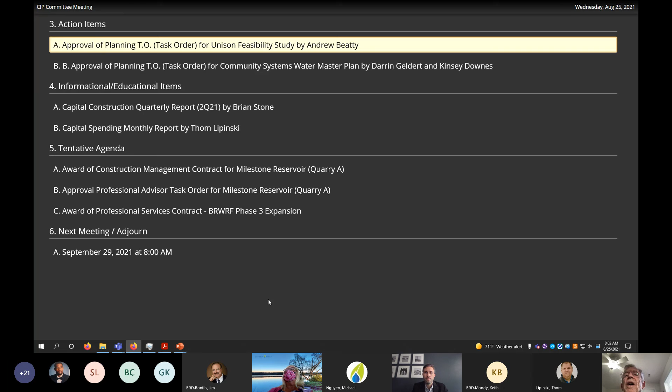Okay, let's move on to action items. The first action item is approval of planning task order for Unison feasibility study.

Good morning to the committee, and thank you for having me. My name is Andrew Beatty, and today I'll be presenting on the feasibility study for the community of Unison. Before I dive into the specifics of this project, I wanted to highlight that this study is being conducted as part of Loudoun County's water and wastewater program.

You may recall that Loudoun Water partnered with the county to establish this program back in 2015, with the purpose of allowing communities to come forward and apply for assistance with any water or wastewater deficiencies they are experiencing. A major responsibility for Loudoun Water is that we are the technical lead responsible for conducting these feasibility studies. As outlined in the program, and as with all previous studies we've conducted as part of this program, Loudoun Water will get reimbursed for this work as it moves forward.

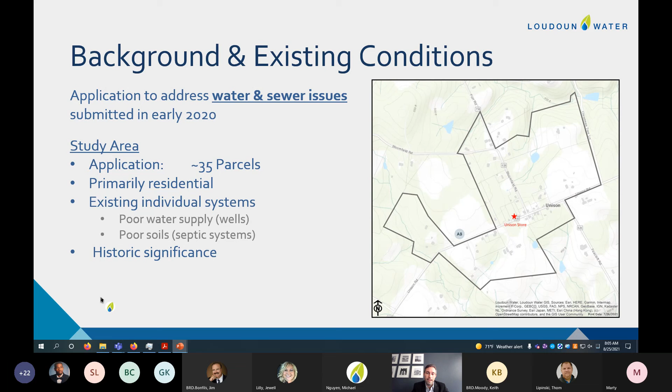It's also important to note that this is a historic community, and that is of significance to the property owners, and will be borne in mind as this project moves forward.

I like this slide because it speaks to a lot of the successes we're beginning to reap since we first partnered with the county in this program. We've incorporated a lot of the lessons learned throughout the years in how best to engage with these communities of need, and that is demonstrated by their willingness to come forward and apply to the program and trust that we can provide assistance to them and help resolve their issues.

We've seen this already, even in scoping the work for this project. Loudoun County staff and the Loudoun Water team have communicated frequently with the project coordinators, who are community members, in order to really listen to them, let them bring forward concerns and raise any issues from the community, let them know that they're being heard and that their concerns will be addressed as the project moves forward. For us, it gives us the opportunity to provide reassurance to the coordinators and the community, as well as manage expectations throughout the process, as this is really just the first step in a long journey to solving any of their issues.

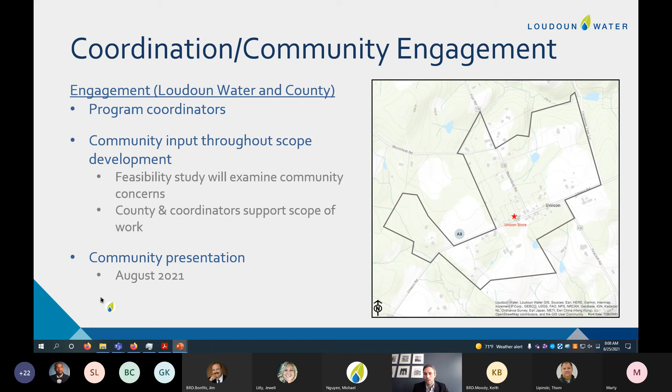Generally, I've outlined the key elements of the scope of work here, and this is in line with the type of work we have done in previous studies, with the main goals being to document the existing conditions, analyze various water and wastewater options, and then offer a recommended path forward for the community.

One item that I will note is the household survey. Whenever we presented this idea to the coordinators, they were very receptive to doing this work. We have learned through our experience from previous projects that we actually glean quite a lot of useful information from the individual responses from the property owners, because it is conducted anonymously. So this is just another example of one of the lessons learned from previous projects in this program, how we incorporate that to really get the best end result. So that's some good news.

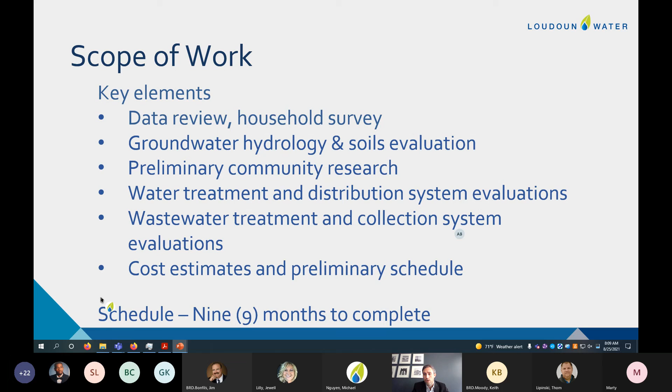Overall, schedule-wise, we're expecting that this project will take approximately 9 months to complete.

For your reference, this is the CIP project snapshot. Really, the two main things I want you to note is that this project has been funded for this year, and that, as I previously mentioned, Loudoun Water will be reimbursed by the county for this work.

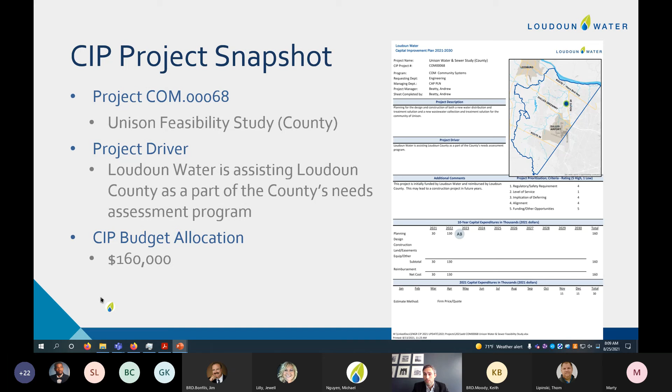The total fee for this project is $140,500. The style and the scope of this work is similar to previous projects we have done in the program. As we are a partner with the county, we have already shared this budget with county staff, and they're comfortable with these numbers.

And then finally, I'll leave before you the recommended motion here, and we'll be happy to answer any questions you may have.

I have no question, I'm just curious though, you mentioned the surveys. Approximately how many surveys do you expect to distribute, and do you have any sense of what the typical return is in terms of surveys? Yes, so for this project, the goal will be to send out a survey and mail it out to all 35 property owners within the study area boundary. We did do a similar effort for the Waterford project.

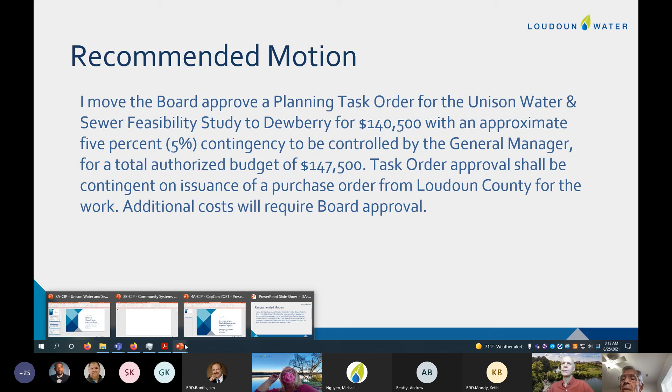Okay, let's move on to the next item. Approval of a planning task order for Community Systems Water Master Plan.

Good morning, everyone. I'm here today to present a Community Systems Water Master Plan task order that we'd like to ask for your approval. I'm Darrin Geldert, I manage our planning programs within the engineering group. And I'm here today with Kinsey Downes, who manages our community systems.

As Darrin says, my name's Kinsey. I manage our community systems. I want to extend a big thanks for his intro, as well as to the committee for having me today. Just stepping through what we do and where we are.

Loudoun Water has 5 independent community water systems that we own and operate. These systems are located along the Route 15 corridor in the county's rural policy area, and of course that's defined by the comp plan as well as zoning ordinances. These systems are developer built.

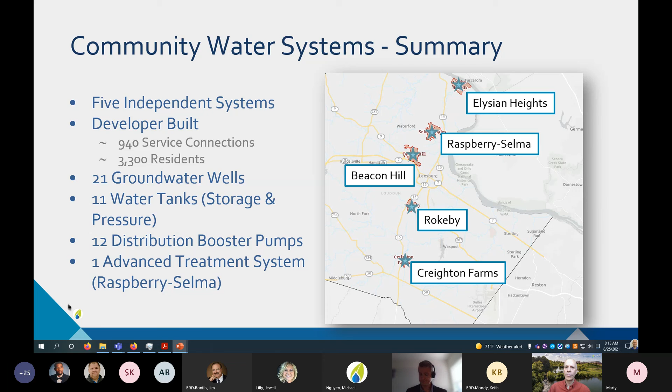I included this slide to just highlight our systems and that they're all somewhat similar. We have groundwater wells located in the developments that pump water to these facilities where it is treated and stored, and it's pumped into the distribution system for use by our residents.

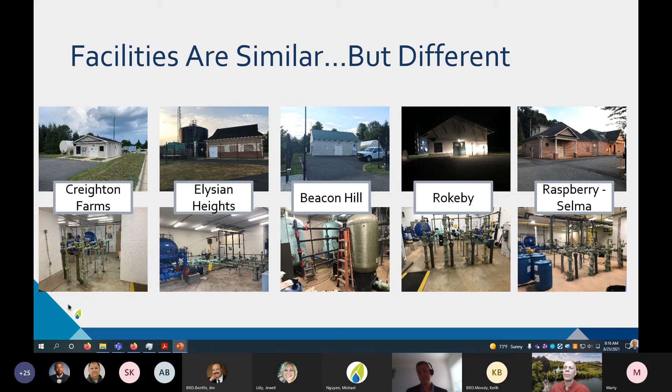Though similar, they're different. You see the sizes, you see the ages - a lot of things that go into planning for R&R activities as well as triggers for capacities. All these assets and their expected lives are at the mercy of system demands, water quality with associated treatment, and of course the materials used during construction.

Darren, please advance the slide. This table right here has a little more details about the systems. I'm not going to step through the whole thing, but I want to talk about the max day column. That is a percentage of the permit that the biggest use for a single day in this calendar year has been used. You'll see that there's 100%.

Not necessarily a bad thing. However, it is a great trigger to understand community use, as well as if we need to do a deeper dive on the reasons why. Highlighting Beacon Hill, you can see that we have about 100% capacity used this year. It was built in 2002, and we had what I call an R&R upgrade in 2019. We did bring on a new source water, which included source water capacity, but that alone did not increase the permit.

I want to highlight Elysian Heights. You can see that under supply wells, I have a 4, then parentheses 1. We have 4 major production wells, and 1 emergency well. There are some restrictions on how this emergency well is used, and it really doesn't have the capacity to be a 1-for-1 replacement. So though it does have a great tool in the toolbox, it is definitely a stopgap if we ever needed to really rely on it.

And finally, Rokeby. Rokeby is also at about 100% capacity, and it was built in 2008. It's one we're tracking. Mr. Moody, question?

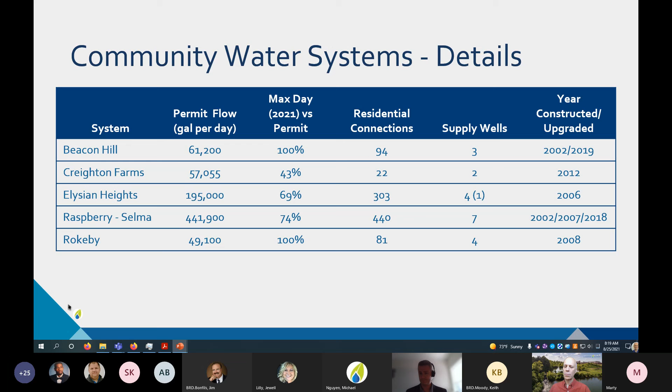Darren, next slide. So you may say, why are we doing a master plan out here? Well, the master plan may address a little bit of the questions you both just posed, but it's also really going to look at the big questions across all the systems, to make sure they're performing as expected, both at the level of service intended in their design, and also what's required by regulation and by Loudoun Water.

So we're going to step through all the different parts, the supply wells, the treatment, the distribution, and make sure they're all operating the way we want them to, then look into the future and ask, are they going to keep doing this? Perhaps there's a desire to have more robust redundancy at all of these and add additional wells, or perhaps there's other distribution upgrades we could do to help remotely monitor some of this.

But basically, we hope for the master plan to help outline a roadmap for us, kind of what needs to be completed, what projects need to happen out there, over the near term and over the longer term, to help maintain and improve our operations. So this is going to tie in a lot with our asset management data, with our CIP process, and it will also impact some of Kinsey's staffing schedules and how operators actually work out there.

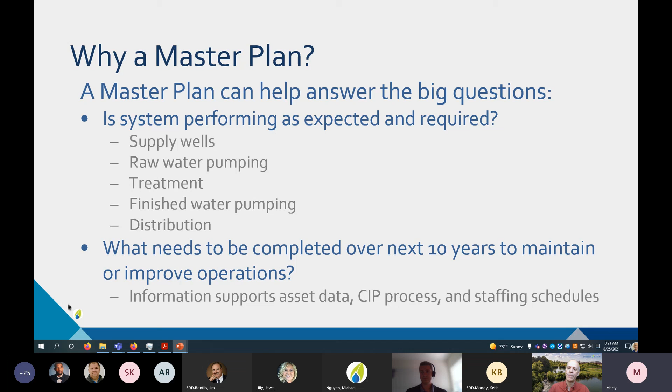And we have a great positive lesson learned from this. We successfully used what I'll call an asset management focused master plan at Beacon Hill recently. In 2016, Beacon Hill, one of our earlier community systems, was approaching its 20-year window where you start looking at replacing some components, primarily electrical, instrumentation, and start looking at how your longer ones are doing.

Staff had fantastic ideas on how we can extend the life of this system, but they were siloed, right? It wasn't under one umbrella. So to help achieve this, we partnered with Hazen, and we tasked them with bringing this under one umbrella, one report that we could champion moving forward.

Just some quick highlights of what they did: they identified end of life, undersized, and inadequate components. They developed this implementation roadmap. This was in phases, looking at things that should be corrected today, possibly near term, and long term.

And of course, we were able to plug this into our CIP efforts, which is a great resource. We have used this roadmap to finish phase 1 and phase 2 corrective actions, and we're always tracking phase 3, seeing if the assumptions still hold true.

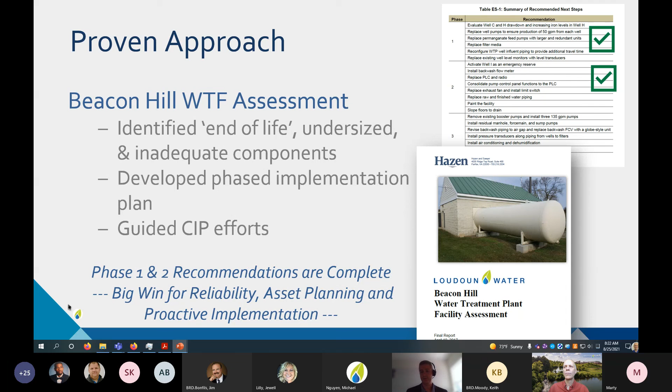So for this project, we worked on the scope of work. It kind of mimics what we did at Beacon Hill, and then probably goes a little bit more beyond that.

It's going to start with what pretty much all master plans start with: gathering the data, reviewing the data. How is this designed? How is it operating? Looking through operating reports, hydraulic models, the groundwater studies already done in the area, tying that all together with site visits and staff interviews to make sure we understand operational strategies and can put a consistent approach across.

And then we're going to develop that into assessments of each facility and tie that all together in this master plan, which will really provide us with a good prioritization of projects that are out there, and provide us that decision framework so we know what to do next.

And then eventually, because this is such a programmatic approach to all of these, this will really streamline our long-term maintenance and operations and help, as Kinsey said, work this into our CIP process.

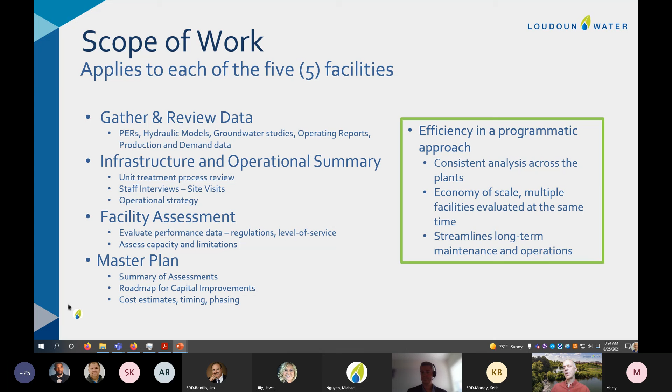So our schedule for this, assuming it's approved and we move forward, would be this fall to kick it off and move through the data review, analysis, and operational reviews.

That will then transition into the assessment and analysis portion, coming up with a final roadmap for each of these five systems, but all tied together to make sure we're treating all these systems with the same level of service, that they're all consistently approached, and trying to figure out where we can perhaps borrow ideas from one system to another.

We're hoping to complete this by spring or summer next year, so we can tie that right into our CIP planning for the following year.

We worked on this task order budget actually for quite a while. I'll let Marty jump in if you have a question.

It's probably obvious, but all of these studies assume current groundwater levels. Is there any attempt to predict the future, to see what's going to happen to groundwater levels going forward?

So we will be asking this consultant we proposed in front of you to work closely with our groundwater monitoring program, which is starting to track and hopefully one day predict what they will be.

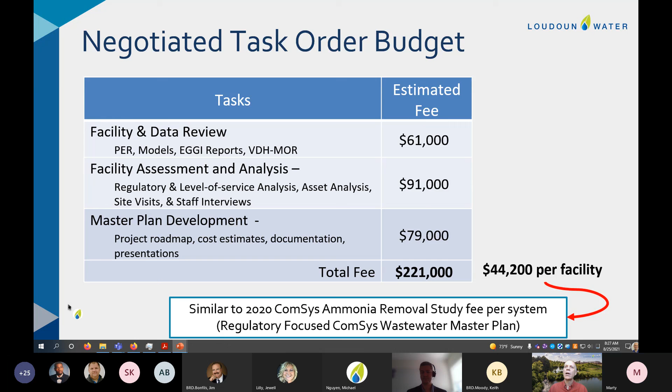And with that, I'd like to open up for any additional questions and leave you with a recommended motion to move this ahead.

Are there any other questions? Hearing none, can I get a motion?

This is Jim. I make the motion for the recommended motion and to place it on the agenda for the next meeting on the consent agenda.

Okay, I second that motion, and I agree to move it to the consent agenda. Thank you.

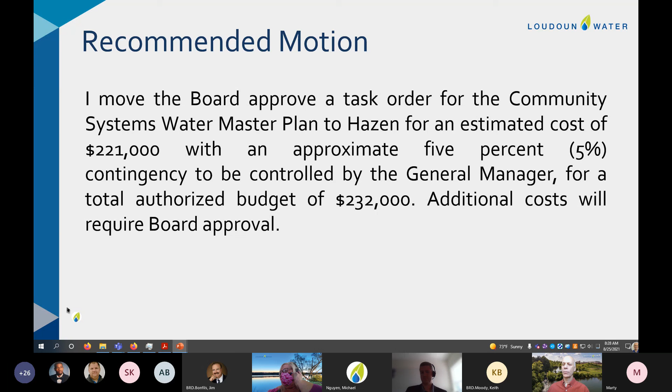Okay, seeing no other questions, I'll take the vote. Mr. Sultan? Yes. Mr. Bonfils? Yes. Mr. Moody? Yes. Ms. Sursakar is absent. Thank you, sir.

Okay, capital construction report. Good morning, CIP committee, CIP chairman. I'm here to present the second quarter capital construction report.

In my report, I'll be discussing the 4 projects listed before you. These are all active projects, and then I'll close the report with the quarterly numbers for all projects, and those that were completed during the quarter as well.

The first project is the Goose Creek Waterline Crossing Project. This project allows us to deliver water from the Goose Creek Reservoir to Trap Rock. Garney's our contractor, and Garney has completed approximately $3 million worth of work through the month of June, and the total contract value is $4.3 million.

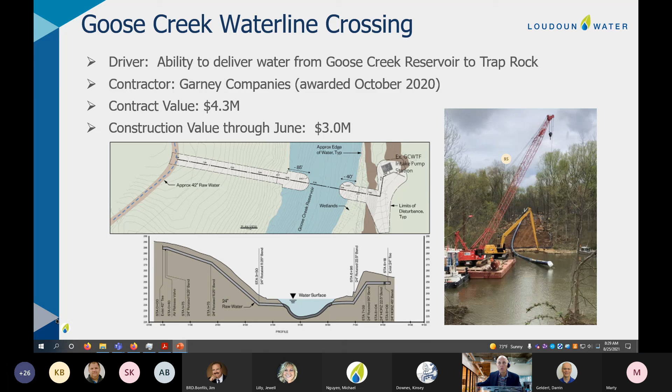The contractor has completed the installation of the water line across the reservoir and has made the tie-in on the Trap Rock side, which is the west side of the reservoir, to our raw water transmission main. They're presently performing work on the east side of the reservoir, where they are removing rock to make the tie-in to allow for the installation of the pipe there as well.

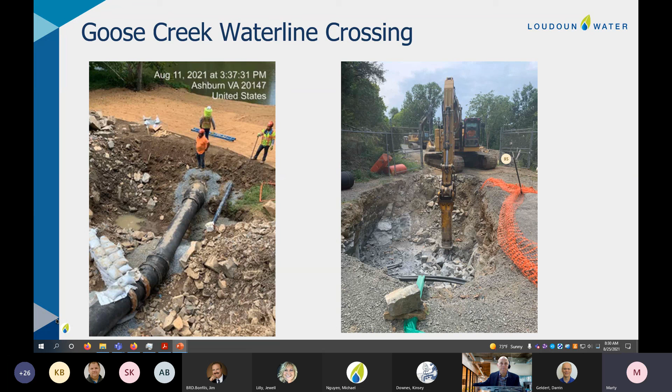We've spoken some this morning about the Community Systems Project, and so I'll talk a little bit about our Howardsville project, which is a county-funded project that provides sewer service to the community. Sagres is our contractor. The contract value is a little under $1 million, and through the month of June, the contractor had completed $67,000 worth of work.

We are anticipating completion of the project this year. In fact, this project includes 2,000 feet of small diameter pressure sewer—1.5 and 2 inches in diameter. This is not a gravity system, it's a small diameter pressure sewer. He should be completing the 2,000 feet within the next couple of weeks, then after that he will begin work on the individual lots to make those connections.

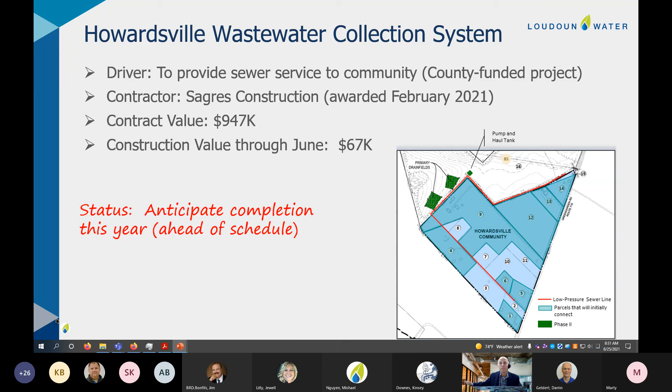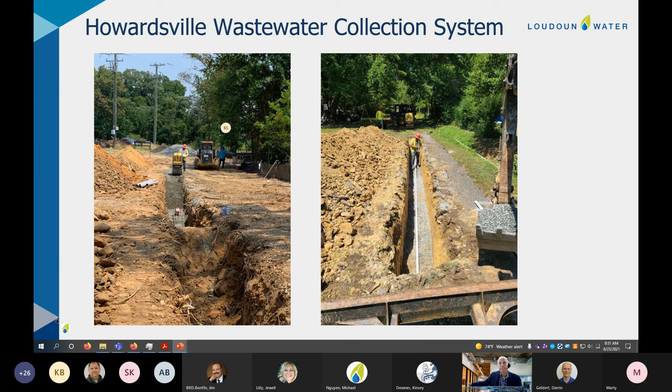Okay, the Courtland Sewage Pump Station project. This is the last of 6 projects to incorporate the Courtland Rural Village into our central sewer system. Sargent Construction is performing the work. They've completed about $3.4 million worth of work through the period, in a $3.9 million contract value. We are slightly behind schedule, but we are presently in the commissioning phase and operating the pump station and performing testing there.

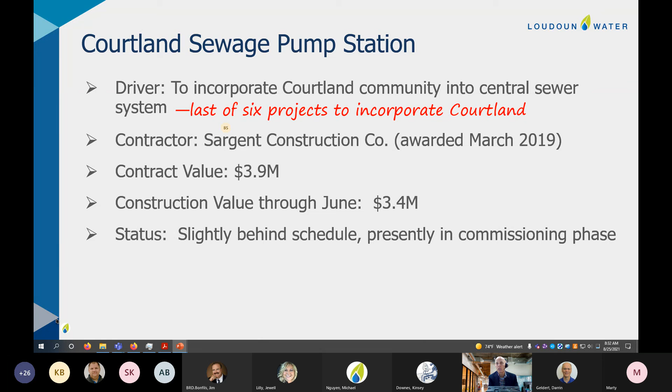Just a little bit on the history. When I say it's the last of 6 projects, the planning for tying Courtland in began about 10 years ago. We actually incorporated the community into our central sewer system in 2018 with the Phase 2A temporary pump station, completed a little over 2.5 years ago. We hope to complete this permanent pump station this year—that's our anticipation, at least. Any questions?

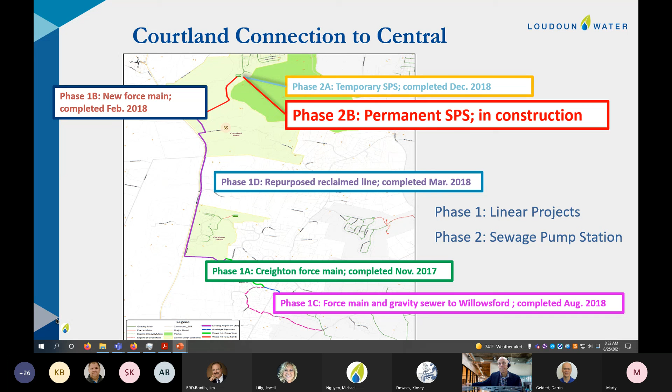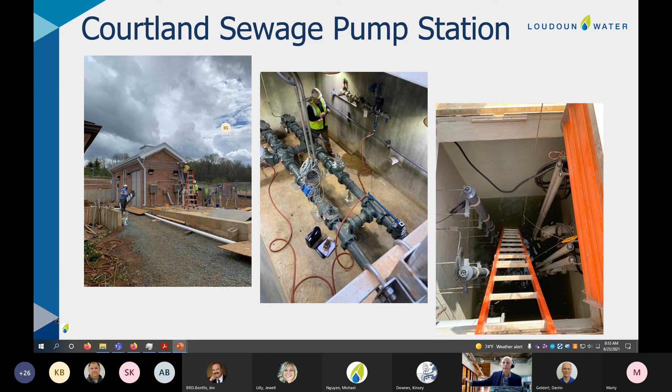So we've got a scheduled performance index, which I mentioned to you a few months ago. We're at 1.14, so we feel pretty good about that. Any questions on these numbers?

The contractor's working all across the site. We have 7 separate work areas where the contractor's performing work, so they're literally all over the site.

I thought I'd show you a few photos of the equalization tank and talk about the progress there. The photo on the left I included in my last report, from April of this year. The photo on the right is that same tank, taken earlier this month.

You can see the walls are up on the tank, and the contractor has begun forming the dome. This tank is 240 feet in diameter, and the dome has no internal supports—the entire support is provided by the walls themselves, so the tank is completely open on the inside. The dome top is heavily reinforced, approximately 2,000 cubic yards of concrete just for the dome.

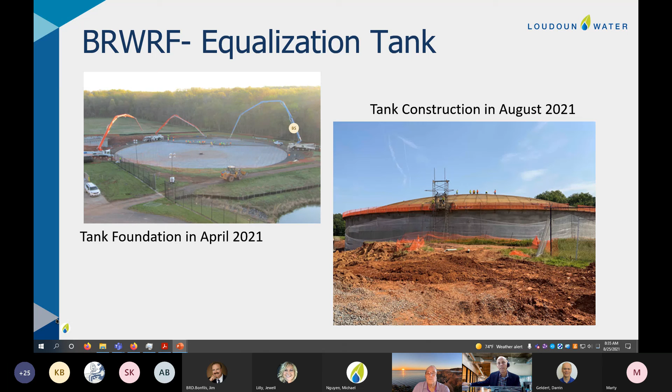Mr. Koblos has a question. Go ahead, Mr. Koblos.

Thanks, Brian. I love your little thing that shows your name on there, and when it was right over top of the $76 million, I couldn't stop laughing. What? Okay, that's all right. Because it says BS, and I was just laughing that it was right over the $76 million. Oh, okay. But that's not why I'm here.

Can you go back to the plan that shows one more back? I think, yeah. Well, back forward. Right, next one.

What is the parking structure for? We have an open parking structure, it's for some of the vehicles we have housed there. We've got some pretty expensive vehicles we want to keep protected from the elements. So is this a Butler building that they're pulling into? No, it's not a Butler building, it's a steel structure, but it's open. I got it, so it's just a roof. Okay, yeah, right, thanks.

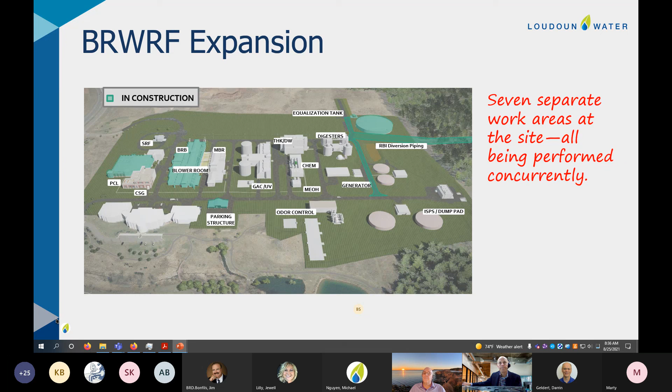Okay, these are some photos of the equalization tank as well. On the photo on the left, the contractor is spray applying the concrete on the outside—we call that shotcrete because it's shot onto the side. This is not a formed wall, but a shotcrete construction.

The photo on the right shows the scaffolding on the inside of the tank that is used to support the construction of the dome itself, which is largely plywood and reinforced concrete. Any questions?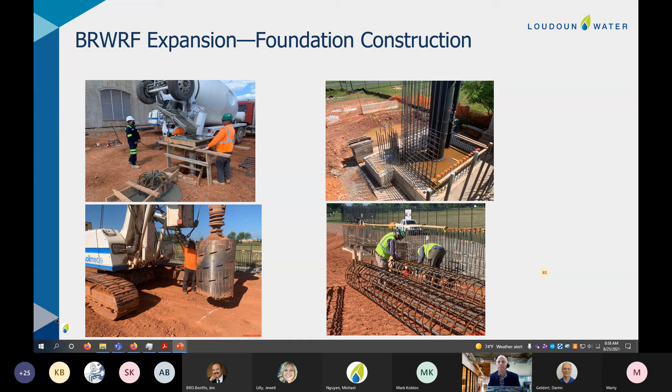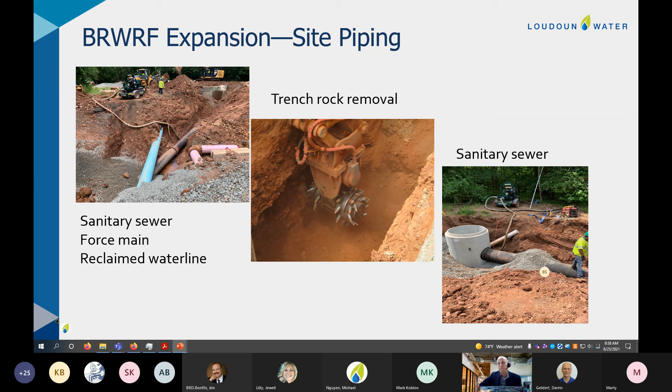The photo in the center is the removal of the trench rock for the gravity drain system, and the photo on the right is a sanitary sewer that's being installed. Any questions?

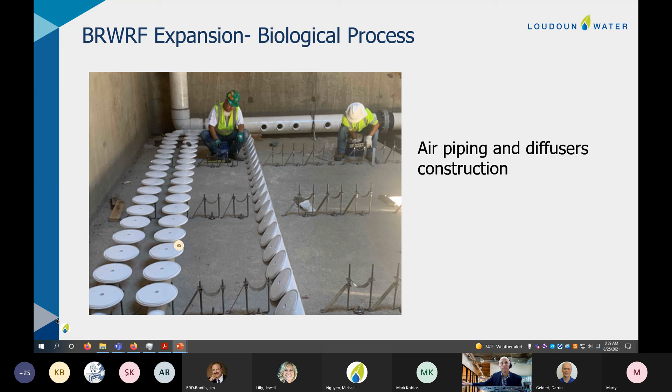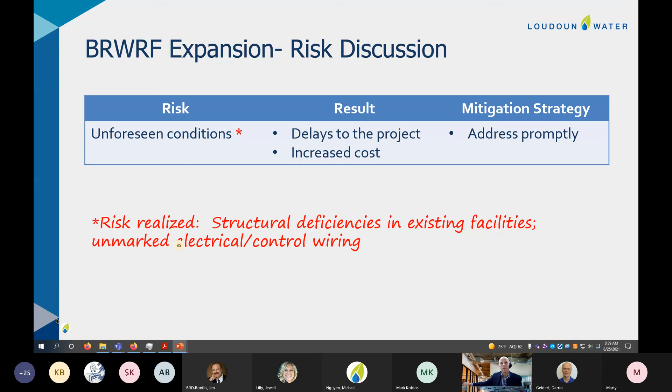When I presented my report last time, and also last year when getting approval of the construction administration services, we talked a lot about risk on this project. One risk we have in any of our construction contracts is the risk of unforeseen conditions. We're actually realizing that risk now because we've uncovered some structural deficiencies in some of our existing facilities, and we've also discovered some unmarked electrical and control wiring. I'm going to show you what those deficiencies and the wiring look like in the next slide.

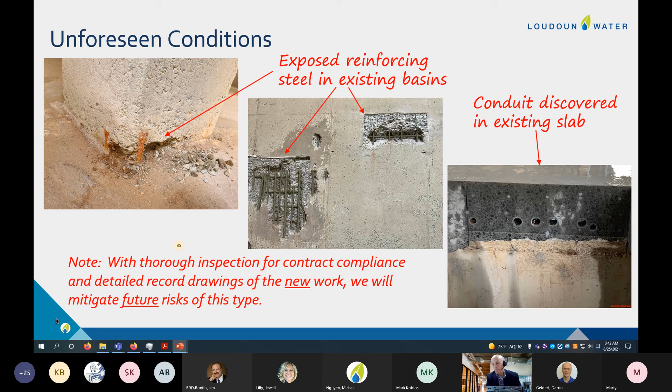Right. Well, what about the areas that you're not performing work? Oh, we're not doing that sort of forensic work to inspect areas where we're not performing work. No. Should we? I'll have to think on that. That's not something we've really considered.

I mean, we're working in all 3 of these biological retention basins. This is the second basin, basin number 2. When we finish the work in basin 2 and we drop the level and clean out basin 1, we'll be able to perform that inspection. And then we're going to also look at basin 3. So we're all going to be looking at these basins, but we are performing work in all 3. If the basins are like this, we'll address that. But in terms of work in other parts of the plant where we're not performing tie-in work or have no need to perform work, we're not planning to do any sort of forensics there. I don't know how to really. I hope I'm answering your question, but I'm not sure exactly how to even do that.

I could maybe step in there, Brian. But that's a really good point you make, Marty. And I think as Brian noted, it's actually not just these basins. If you looked at the drawing that Brian had up earlier, we're going into many of the existing facilities as a part of this work, and we'll have an opportunity through that work to make observations that have not been able to be made up to this point. So we'll certainly, and we want to, as a part of our asset management program, incorporate some inspections of these types of potential structural deficiencies as a part of those future observations. That would be rolled into our long-term asset management planning to make these types of physical observations of these various facilities. But that is a really good point, and we want to begin to incorporate those kind of practices not just this, but in all of the work we're doing.

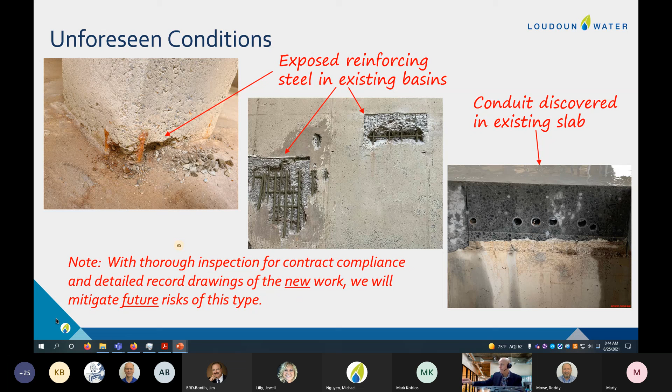Any other questions? Great report, Brian. I always enjoy your reports.

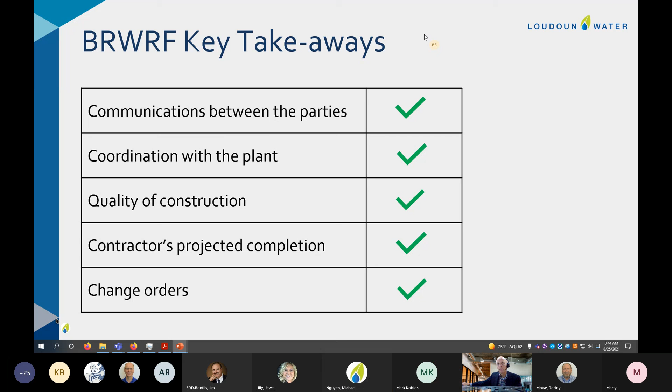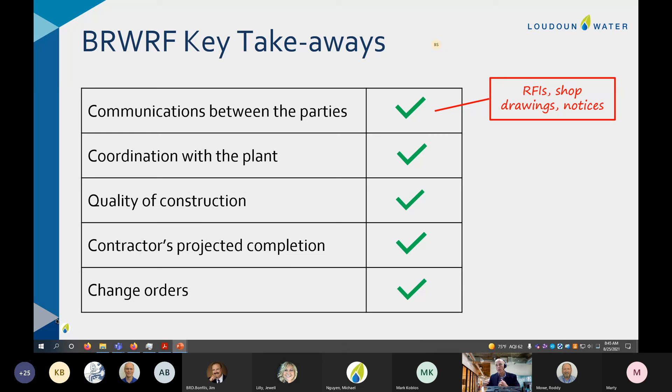Thanks. I've just got a few key takeaways here, and then I'll wrap up with the numbers. I think we're communicating well with the contractor. We've got the processes in place for RFIs, shop drawings, notices between the parties, and all of that's going really well. We're coordinating with the plant. As I mentioned, we're working in 7 different areas, and we're still continuing to meet permit. I'm really pleased with how things are going related to plant coordination. I think the quality of our construction has been good, and where we have had issues with the contractor and the workmanship, they've addressed that promptly.

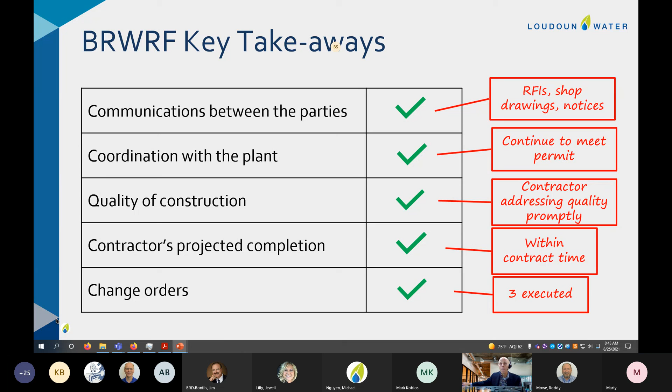Right now, the contractor is showing completion within the contract time. Through this period, through June, we've executed 3 change orders. Those were all good numbers.

These are the numbers for all of the projects. I just want to point out that I'm not reporting any more in terms of photographs on the Horsepen project, Brambleton, or Cedar Crest, because those projects were substantially completed several months ago. I will report that we have moved our staff into the O&M building that was renovated. There's a few things that we're still working through, some issues with our contractor on that project, and we expect to get that wrapped up here within the next few weeks. And then the rest of that I've reported on.

I'm told that the Broad Run, the last project, the window and wall sealants was actually completed back in July. So I'll show that as completed in the next quarterly report. Any questions on these numbers?

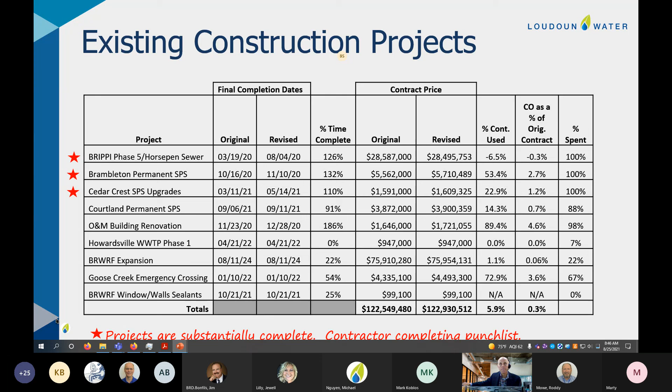Okay, so for the period, we issued notices of final completion on 3 projects: the Upper Foley generator replacement, the Guilford Station 30 by 12 inch connection, and the Beacon Hill I&C project. Our change order rate there is roughly 2%.

Any questions? I can honestly say that you guys do a damn better job than my construction people did when I was at Fairfax. You guys, and I second what Mark said. I enjoy your reports. Thank you, sir. I appreciate it.

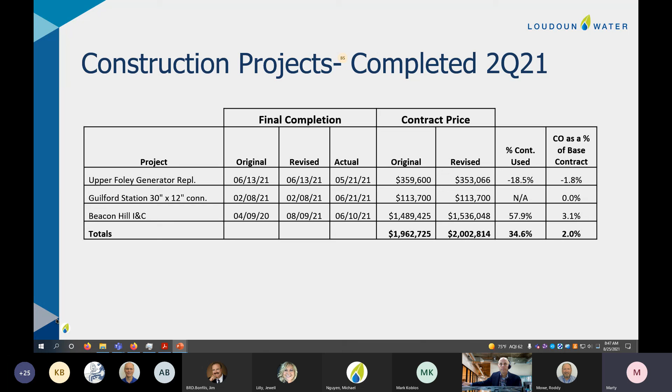It's kind of tough to report some of the structural deficiencies at Broad Run, but I appreciate your support on that, and we're addressing that. We're going to get that fixed. And if there are no further questions, thank you for your time.

Okay. The spending report, any questions on that?

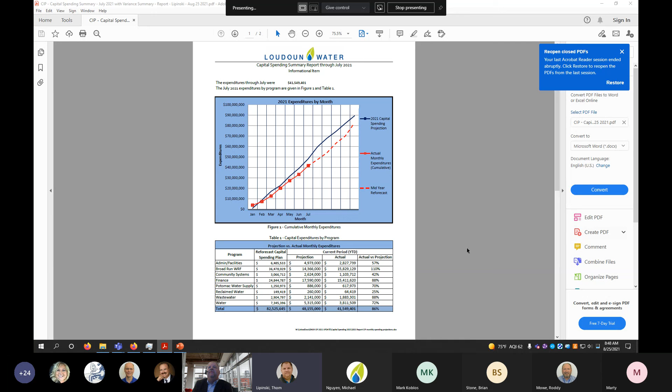Yeah, hi, good morning. I'll take a few moments if you'd like, just to make a few mentions about the capital spending report. Since it's the mid-year, we did a reforecast, and that's shown now here on the report. You can see the dashed line representing the new forecast. Through July, our expenditures were about $41.5 million, and you can see at the bottom of the chart, that's about 86% of where we were with the original projection of $48 million. So spending is at about 41.5 right now.

Just looking back over the last couple of years, that's compared to we've been at about 33, or $30 million in the last few years. So our spending this year is a little bit ahead of how we've been spending in the past couple years.

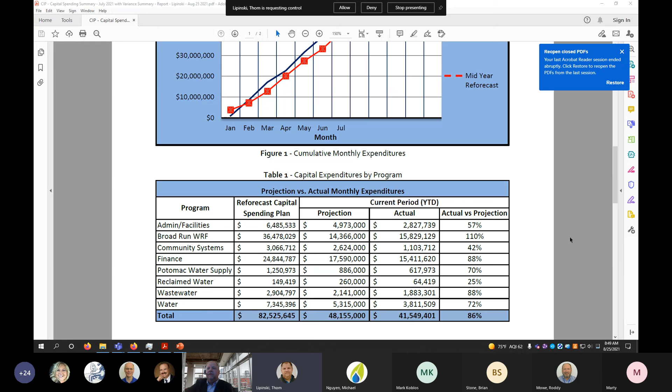And then if I can flip over here to the next page where we have a little bit of a variance report for the reforecast. So the original capital spending plan budget for this year was $89.7 million. Based on the reforecast that we just conducted, we think that number will now be about $82.5 million towards the end of the year, about $7 million or so lower, or 8% of the original budget.

And then you can see that we've categorized that into a few different categories on what the reason for those variances are. I think with that, this similar information will be shared at the Finance Committee meeting as part of the overall budget discussion. If there's any questions, I'd be happy to answer any on this.

It doesn't seem like COVID is affecting you much. No, we've been able to find our groove and largely keep going. And so I think we're all pretty proud of that. Well, okay, then thank you for your time.